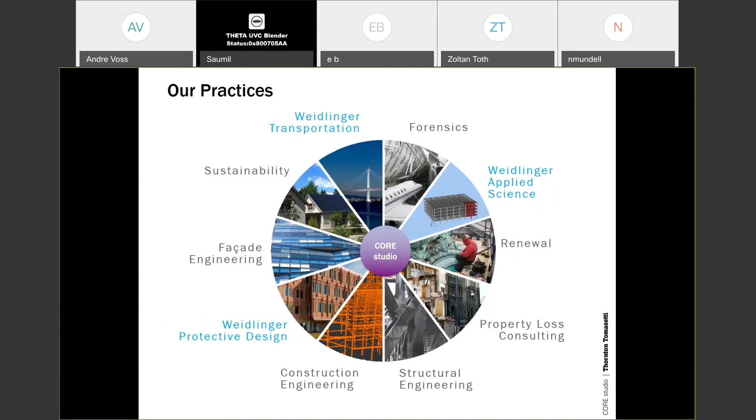Like I said, we're a big company, lots of offices and lots of places. New York City is the home office. And we actually are going to be merging with our downtown office next year into a brand new site on Wall Street, which is quite nice.

So who are we? Like I said, we're a group inside of a larger structural engineering company. Our mandate is to be a firm-wide incubator of ideas. So we essentially try to increase the value we bring to clients through innovation. Our goal is to take ideas from the firm as a whole and kind of shepherd them through the process to an actual tool that can be developed and deployed firm-wide.

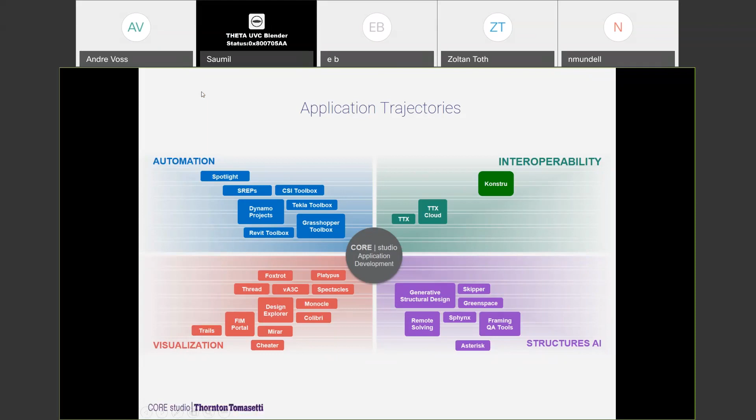Konstru is an application that allows translating a model between multiple platforms. It can be structural, architectural, and any other one.

The first step to upload the model to Konstru is to upload it to the online cloud, which has clients on multiple platforms. The upload process is really easy, it only takes a couple clicks, but it uploads all your geometry with all the attributes. So from Revit, for example, you can bring all the families and categories. And this web viewer allows you to visualize your model by different types of elements.

You can also see all the changes that you made in the model. So as your project progresses and you upload multiple versions of the same file, you can see what changed, like which elements changed or were created or deleted in the model, which is very useful because sometimes it's really hard to track all the changes, especially when you have a big team and multiple offices across multiple cities.

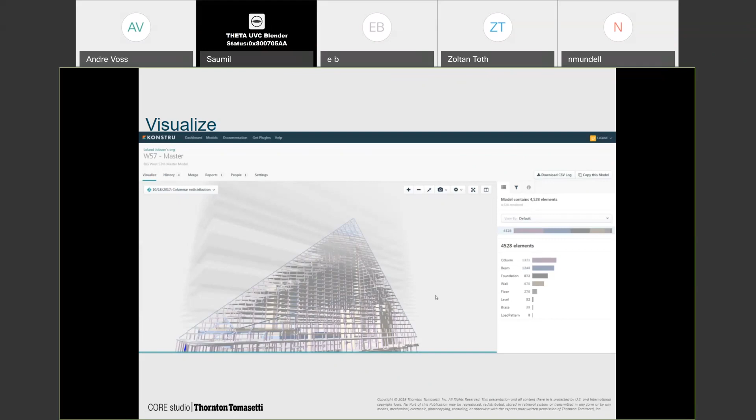Here is an example of collaboration using Konstru. A model is created in Rhino and Grasshopper, then easily exported and translated to multiple platforms with all the attributes attached. So it's not just pure geometry, it's all the information that is so important and necessary for collaboration.

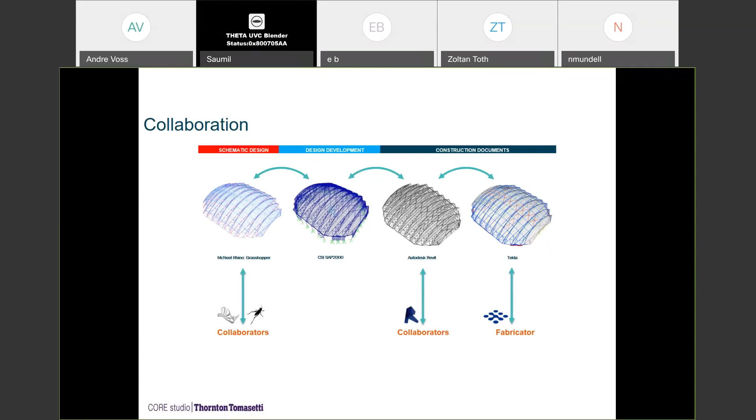The second application is Mirar, a web viewer. This is an example of a model, a Revit model, that's been brought into Mirar.

Mirar is a sharing and viewing platform. It also brings all the attributes of the original model. For example, here we have different families and object types, and you can easily color this model by attributes in the web viewer. It's really easy to see all the elements and share this with collaborators or your client. Mirar models are really easy to upload on the web and access from any mobile device, even your phone.

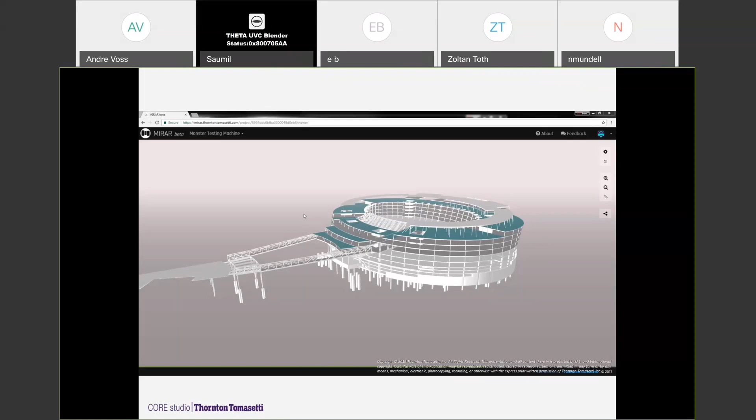Thread is another visualization application which takes a CSV file as input and allows you to create a dashboard to represent your project. We have a lot of different widgets you can see here, different kinds of diagrams and images you can place on your dashboard to create a report about your project.

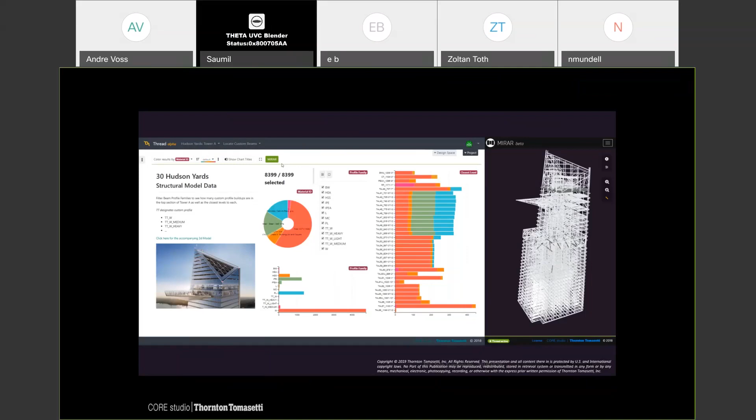These two apps, Thread and Mirar, can talk to each other and the models can be linked. So if you filter some elements in Thread by a certain aspect, those changes in visualization can be viewed in 3D in real time in the Mirar viewer.

This is another example. This was a Revit model brought into Thread, and on the left you can see two widgets that represent the types of geometry that exist in the file. On the right is the Mirar viewer, a 3D model that can be rotated, explored, zoomed in or out, and cropped in any way.

When you filter, you can select one of these objects, and it will filter and color the elements in your 3D model by the attribute you select. This can really help you visualize your model, since it's often hard to see some elements of the model, and this allows you to visualize them really well.

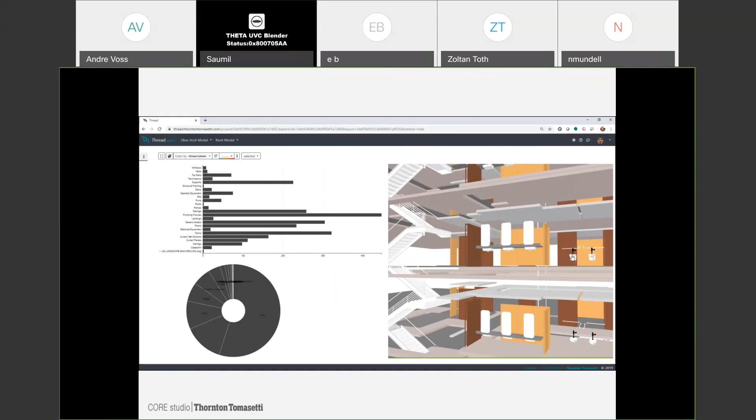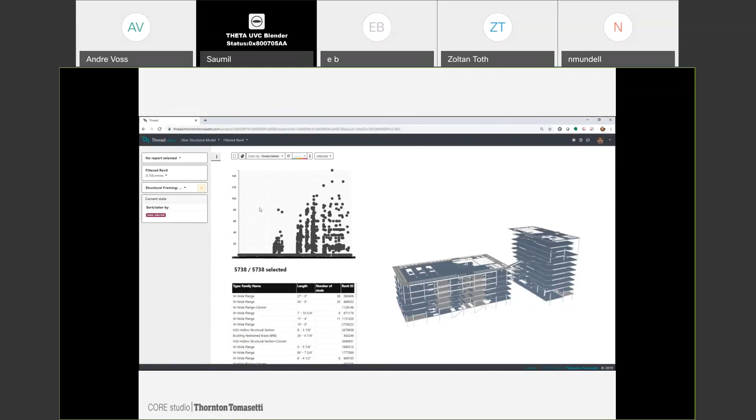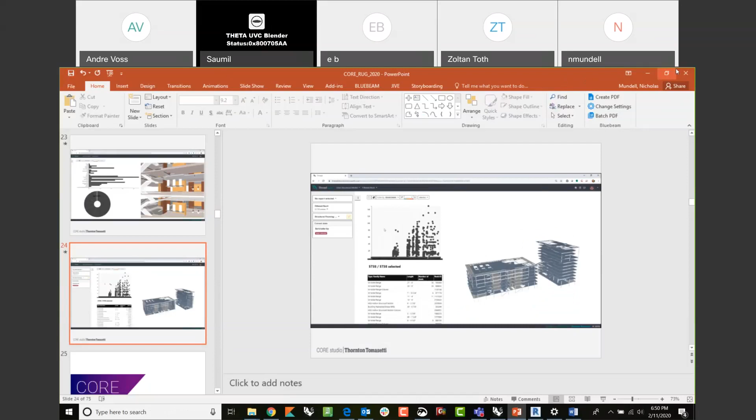Try and save a couple of these videos. I know it will work. PowerPoint can be quite painful. Put a lot of work into making a live demo for a video, and the video doesn't play. A restart should do it.

Yeah, so the first app that Sasha mentioned there, yeah, but this is a Microsoft product. Microsoft product. Yeah, okay, will this play? Yeah, all right, so we'll just do it at this scale.

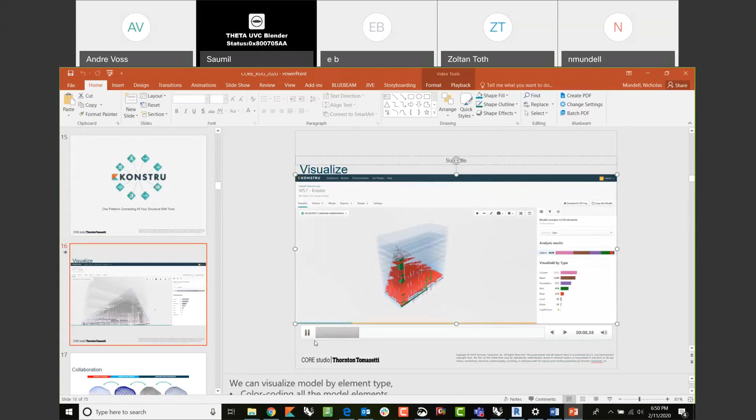So this is a Revit model we uploaded to Konstru. We're going to visualize first by type of object, so you can color by type: show me all the floors, all the walls, all the beams.

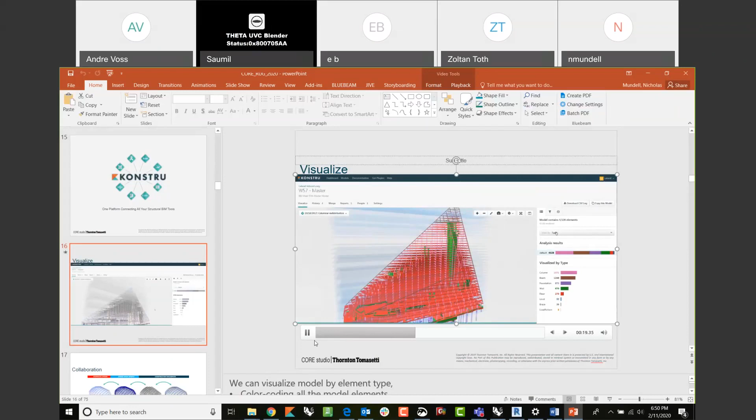In addition to color by type, because this is a database, and every time you upload to the database you're creating a new version of the file, we can actually visualize by change. In this case, we're looking at the model and seeing that since the last update, 328 objects were updated. We can zoom in and see it was actually the properties for the facade columns. Click on a facade column and it'll tell us what the size was before and what data changed after.

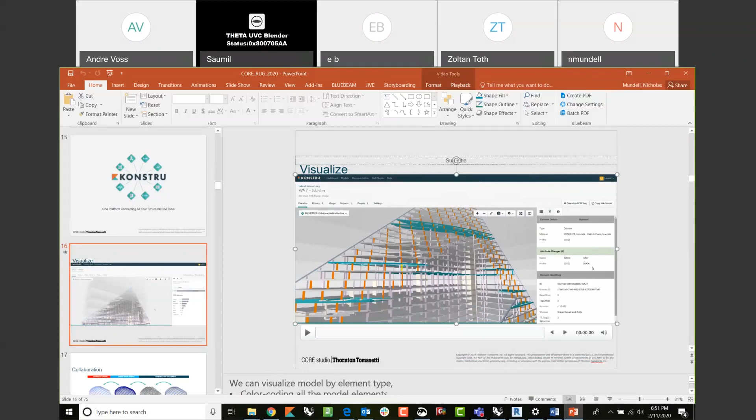We have a fix for the videos, but I'll just keep moving it a little bit. Sorry, Sasha, to jump in.

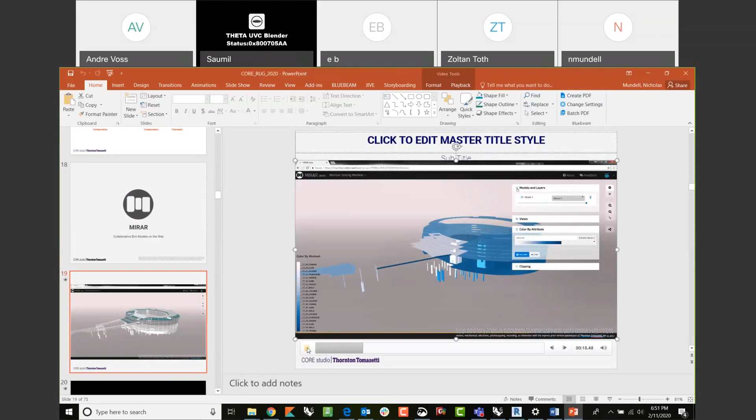All right, Mirar. This is a button we have inside our Revit platform. You click upload and it takes a Revit model, uploads it to a website. This isn't quite as detailed as Konstru, but you get all of the Revit properties attached to it, enabling you to make visualizations by, let's say, color by work set—show me all the objects on every single work set and give me a visualization of those colors in the 3D view.

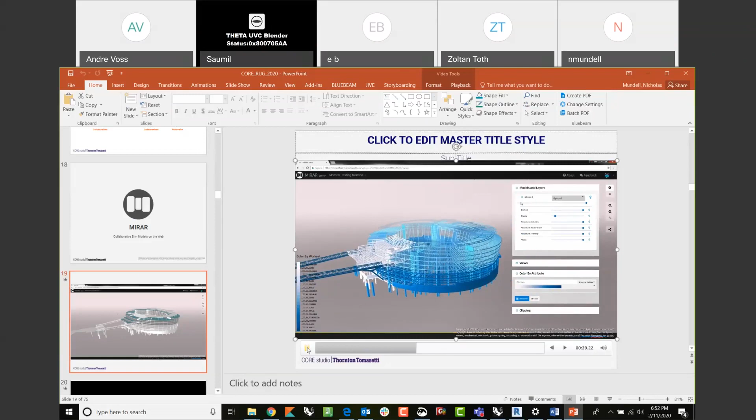Any Revit parameter or data attached can be filtered in the Mirar view. We've also got controls over extents, clip planes, transparency—most of the things you want in a 3D visualization. All the data is still attached, so you click on an object and get the attributes and properties on the left. Clipping regions and all that make large 3D models much easier to handle, since most of the time we're only really investigating one floor plate at a time.

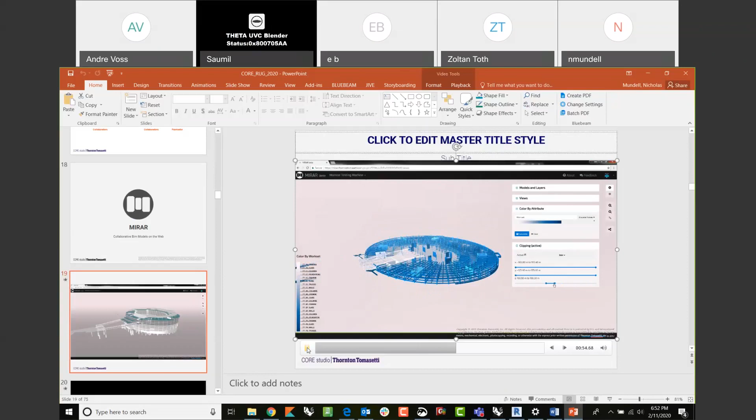So these are apps we've developed for TT to increase our collaboration and efficiency. If TT people want to share a Revit model with someone who doesn't have Revit, they upload to Mirar, and they've got pretty much a licenseless 3D model.

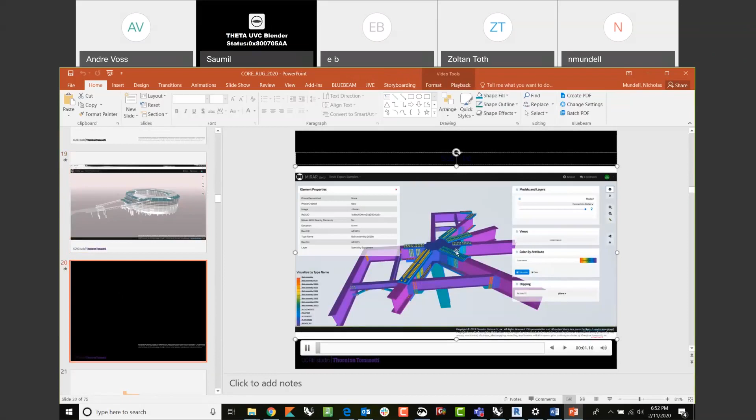Next little demo video is some more Mirar. We don't use it for just BIM models, we do a lot of steel detailing, so this is a Tekla model. We do our structural analysis, taking our analysis models and extracting relevant data, making visualizations our engineers would otherwise be unable to create in their native platforms. It's really just data visualization, taking objects with information and giving users a different way to show it on a screen.

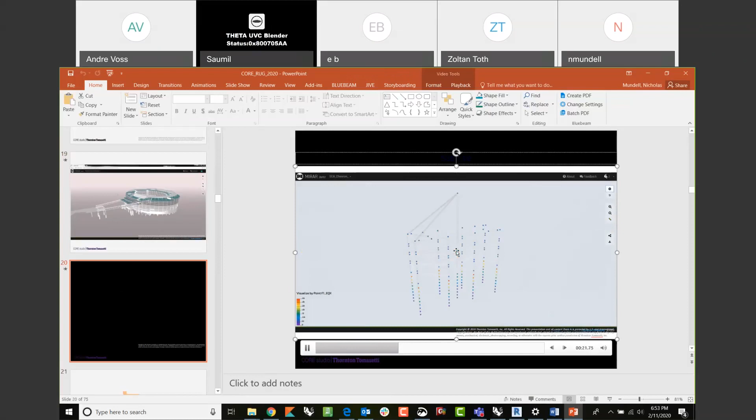This is a really nice video. Mirar was our first step, making just 3D visualizations. Then Tableau became a really big deal, and we decided we had to get into dashboards. So this is taking a Mirar model and tying the visualization to attributes that can be filtered through widgets in a dashboard. Show me all the beams of a certain category in the model, show me all the objects over a certain force level in the model.

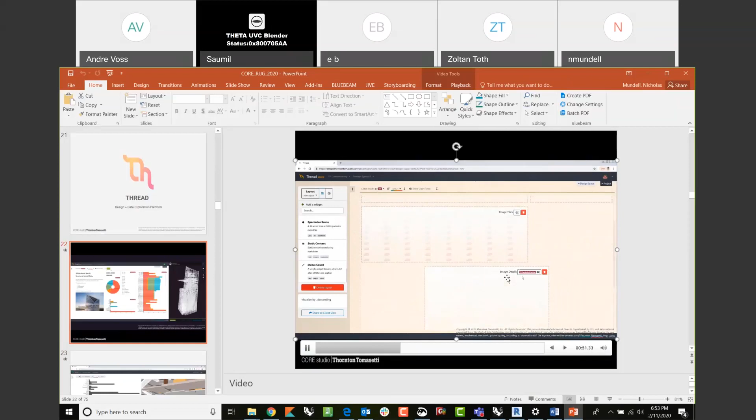I'll leave this one quite long, but we're uploading images, we're uploading data sets. Here's our dashboard. Lay out the widgets you want, choose the graph types that make sense for the visualization you're trying to make. Lay it all out, and then start filtering through your data.

Did anyone here have experience with Design Explorer in the past? Design Explorer was a parallel coordinates chart, pretty much similar to what you see on screen here, developed by Mostapha from Honeybee way back in the day when he was an employee of Core Studio. So we're taking that to the next level with Thread, having the ability to add many different widgets, not just parallel coordinates. You can even do search bars.

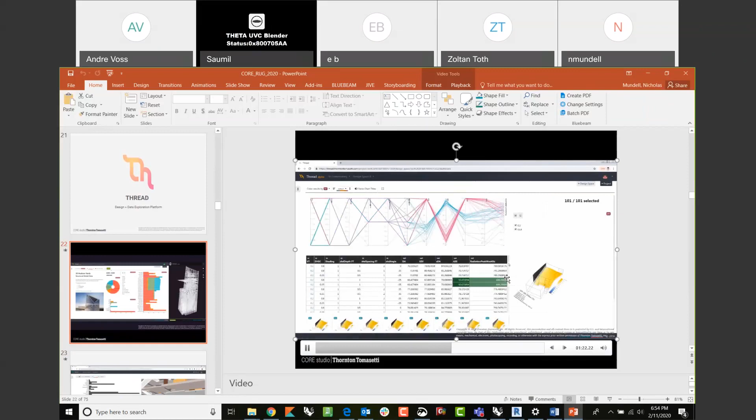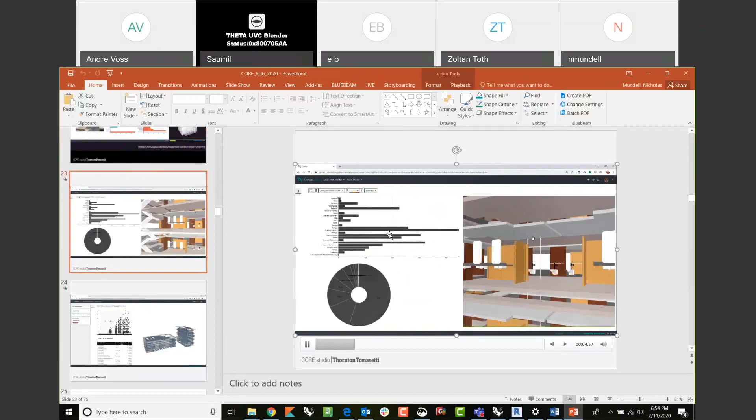So Revit model search is a possibility with Thread and Mirar. The last video we have here shows a model uploaded from Revit, and then using the widgets on the left, all the properties are there, just like you would see in Mirar. We can start to color by or select specific objects from the model and then apply the graphics on the left to the model on the right.

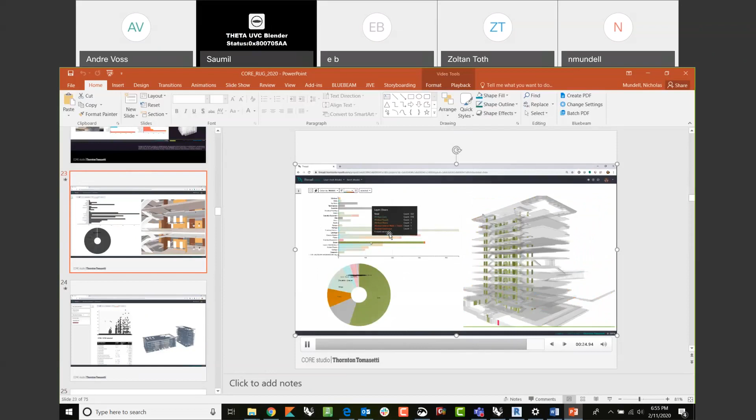So it's much of the stuff you can do natively in Revit if you're pretty savvy with filters and all that carry on. Our goal is to build stuff that even the most basic Revit user has to click one button and go to a website, and these are all prepackaged for them, so there's very little effort on their part to put it together.

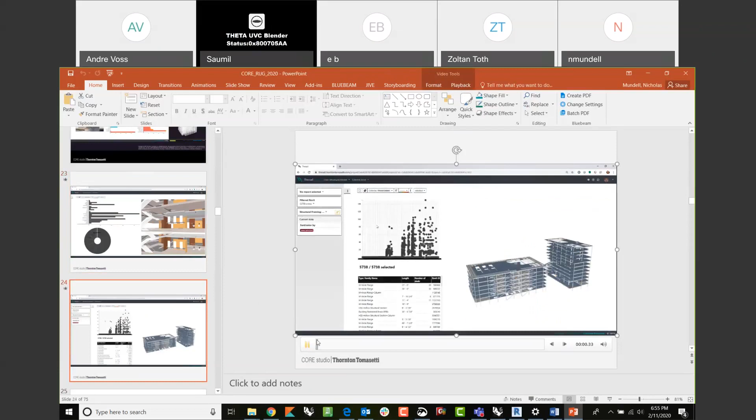The last video here is specific to structural models. This is where we're visualizing the number of studs as a property on the objects in the steel framing. So that graph on the top is showing you the length of the object versus the number of studs applied—that's the ratio we're looking for here. Again, as you filter through the graph, the model visualization updates based on choices made from the widgets on the left. It does depend on models being data rich to make use of this information, but we assume that with BIM models, we're making more and more data rich models as we go.

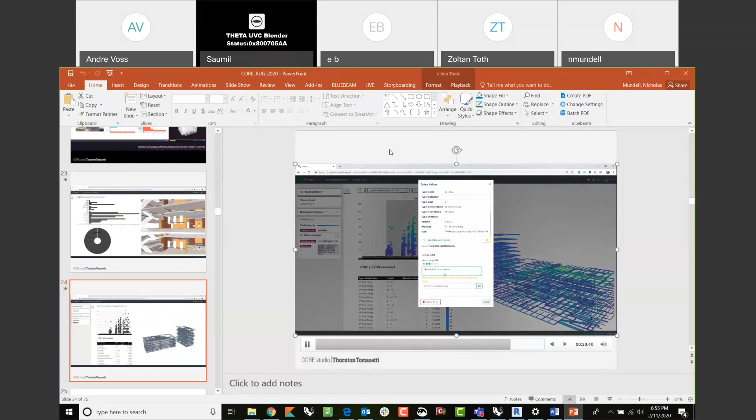Okay, so that's the end of that section. Jonathan's going to jump in now and tell you a little bit about core modeling. I think we have some videos in here too, so you might want to—I can't remember, is it a GIF? Want to go full screen? Try full screen. I think you guys might fail.

Okay, hi everyone, my name is Jonathan. I'm with Core Studio, more specifically Core Modeling. I'm one of the computational designers there, and I'm going to tell you about a couple projects we've been working on or have worked on that reflect the stuff Core Modeling does. To start, we're going to talk about Pittsburgh Airport, more specifically its roof, which is what Core Modeling got tasked with.

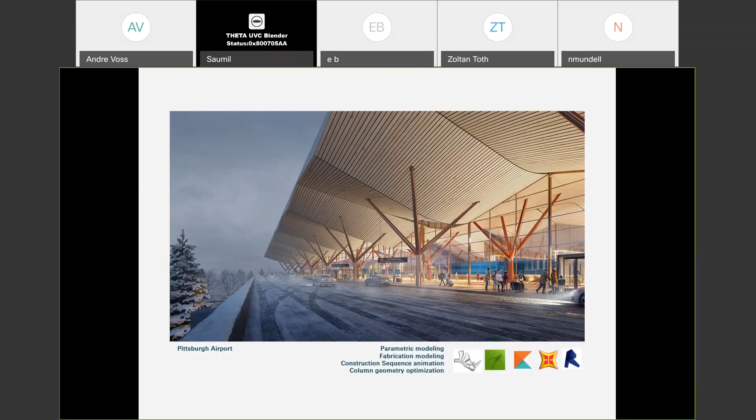It has to deal with a series of many conditions, and we went through all sorts of different software, including Grasshopper, Rhino, Konstru, Revit primarily, and SAP, among others.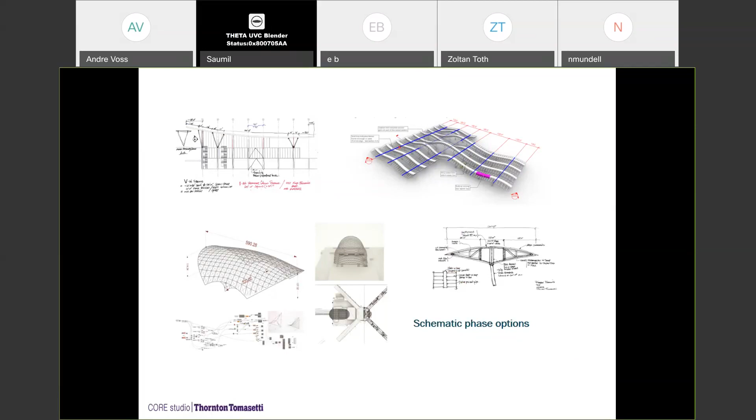The Pittsburgh Airport, one of the biggest challenges was solving its roof. You saw the architects' undulating roof systems. They tasked Core to figure out different ways we could, in collaboration with engineers, create structures for the roof, along with spines and all sorts of different design iterations. Ultimately, we ended up on a simpler design that consisted of a series of bays that would run along each individual ribbon. This is the one you see on the screen here.

To get to this point, Core Modeling had to go through a lot of different parametric solutions, ultimately building a script that let us generate a series of framing that we could import into Revit and create drawings from it, which from the engineer's point of view is amazing because it saves time. But from the architect's point of view it's also great to be able to make changes to the roof, generate framing, pass it back, in a continuous feedback loop.

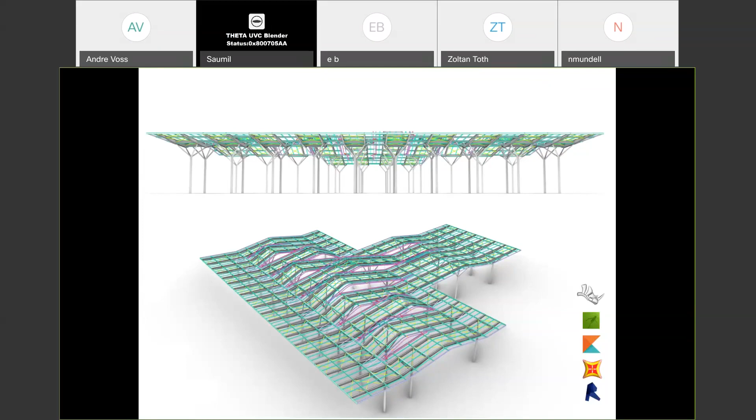It was also great using the software we have in hand, like Grasshopper and Konstru, which let us easily go between different analysis platforms, or Revit, which is more like a BIM and drawing platform, and so forth. Any changes that came our way, we would go in and try to create the script that could accommodate for such changes.

One of the things about Pittsburgh that stood out the most was that it was so detail heavy. As you notice, there are these sort of columns that stand under it, like tree columns, as you see in the bottom right. What was interesting is that at first they were all very unique. You have this undulating roof structure, so how do you solve for something that's unique and make it a little more standard?

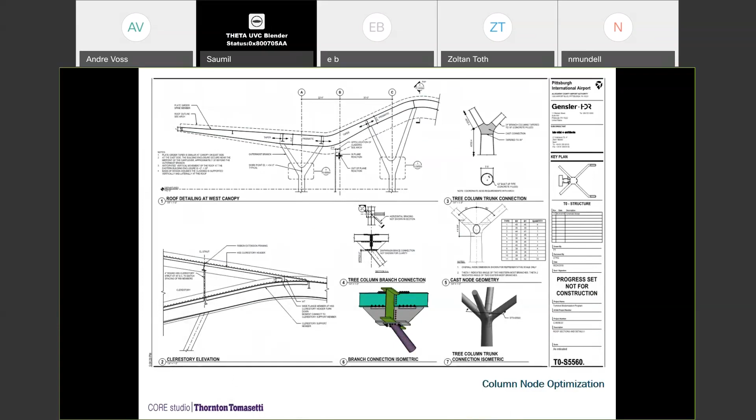In other words, don't blow up the budget. So we started looking into other ways of optimizing. We took the roof and started having it talk back to the columns, and maybe optimize the angles between them, which is what this little animation is showing. It's an optimization, trying to figure out how we could take all those nodes representing the columns and minimize them to a series of types. Instead of having like 20 different column types, we have maybe 10 or 8 or 7 that we can just cast repeatedly. This saves budget, helps the architect keep designing while maintaining its aesthetic, and helps the engineer keep its sanity, since we're not having to size all these different unique members.

One thing I also wanted to note about Pittsburgh Airport is that it was one of the projects that really emphasized communication between design, with the architects using a lot of Rhino and Grasshopper, and then Revit, the BIM platform that lets you do everything we all know how to do now. Thanks to the tools we developed in Core Studio, primarily Konstru, we were able to seamlessly go back and forth, creating models that we could update in Revit without having to regenerate an entire new set of frames within Revit.

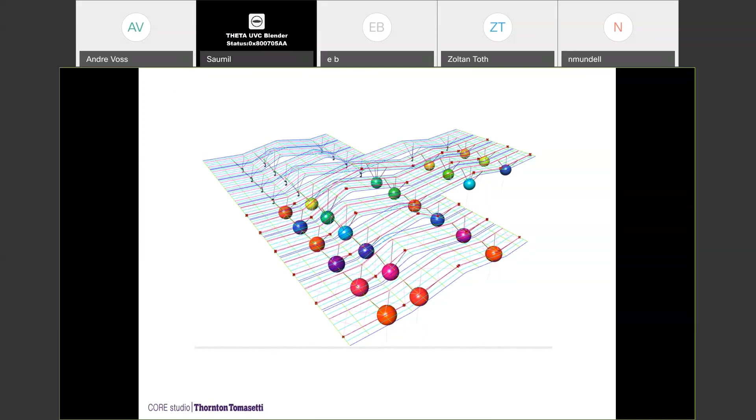Here's another project I'll quickly touch on, more on the design-heavy side, where Core Modeling was tasked with helping fabricate the facade. This is the Lucas Museum of Narrative Art, and Core Modeling of New York City, along with the LA structure team of Thornton Tomasetti, was tasked with rationalizing what you see on the exterior, this crazy looking facade.

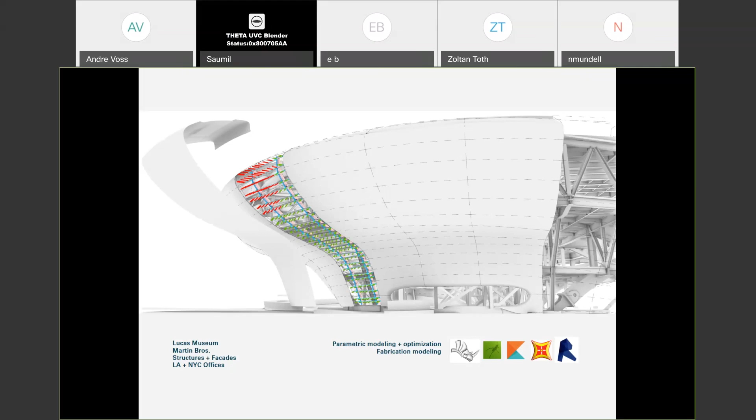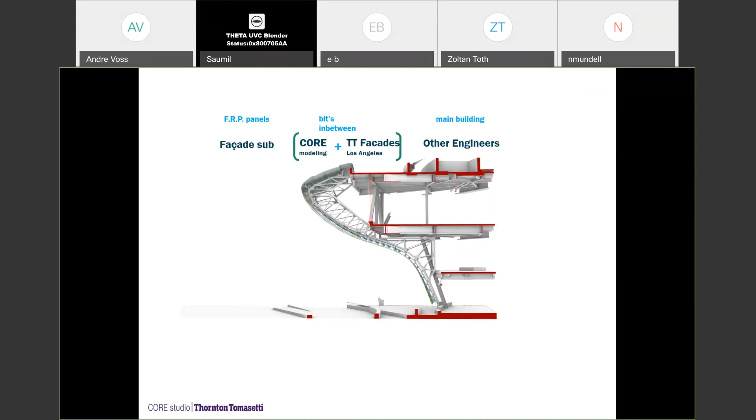That's kind of what I'm trying to explain. You have Core Modeling and TT facades trying to figure out the bits in between, other engineers working on the interior structure, and a facade subcontractor working on fabricating the facade.

What was particularly different about this project compared to others is that it was essentially one giant Maya mesh. I don't know if you're familiar with Maya, the modeling platform, but think of it as just a crazy mesh in space with absolutely no dimension, no measurements, no sensibility for fabrication. Once we got the model, we had to talk with TT Facades and try to rationalize a way we could break this into pieces.

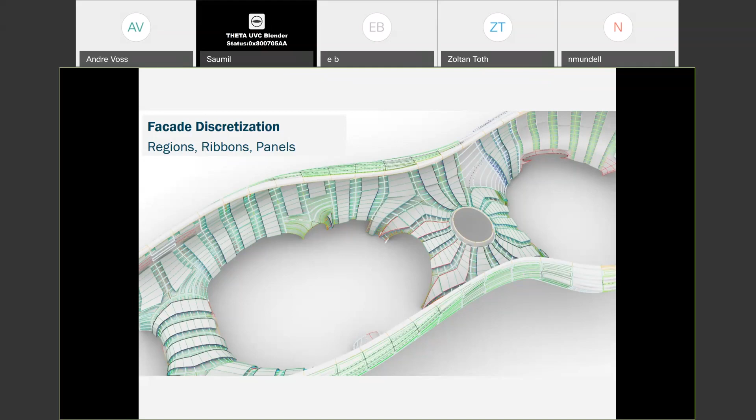In other words, discretize it into regions, ribbons, and panels. We looked at the topology of the thing and started figuring out how we could create ribbons. Each ribbon is then composed of a series of panels that we could then think about structuring back and forth, ultimately taking something that looks almost alien, like a spaceship, and bringing it down to reality—something we can actually build.

Along the way, we worked with the engineers and fabricators trying to figure out different structural assembly concepts, how we could begin to look at primary, tertiary structure, and then connecting back into the main structure, while still maintaining an overall aesthetic of the piece and not creating an overly complex design.

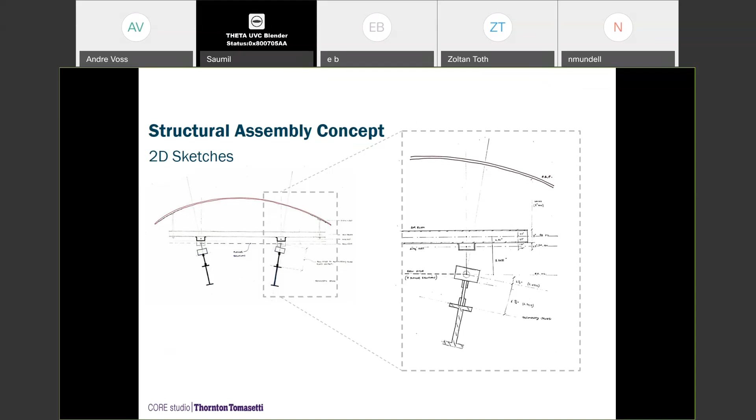What you see here is a series of beams attached to a series of ball hitches, but they're attached to trusses, which then connect back to the major structure. The arc represents one of the panels, because as we saw in the previous images, none of these panels are remotely straight in any way, shape, or form.

One of the things we do have to look at is planarization, which using Grasshopper and Rhino, we were able to quickly generate all these different conditions and look at planarization, and different ways we could create panels that could then inform placement of elements, members, and frames.

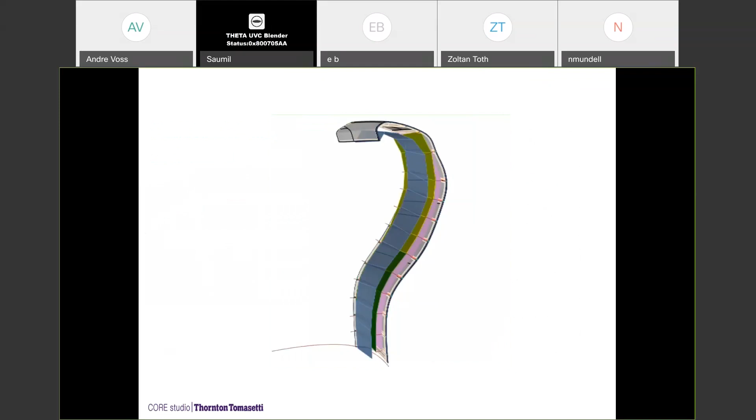Once we got a workflow in mind and established, we were able to quickly start developing and testing the overall facade, and then creating a series of center lines. The benefit of that is that once we create a series of center lines, we can then translate these pieces of information into any other software.

It can be for analysis, or it can go straight into Revit, which ultimately this thing had to go into Revit, which was the workflow.

No, it's fine, it's fine.

Anyway, one other thing I want to say is we were talking about the workflow of the Libeskind project, where it started out pretty heavy on Rhino and Grasshopper, and pretty much going straight into Konstru, and then to SAP and other analysis platforms.

Ultimately, once we created all these centerline models, we could then have the center lines being formed properties and bring them into Revit. So then we could start using Revit to create all our drawing and documentation, eventually creating something that's kind of out of this world looking, but making it rational.

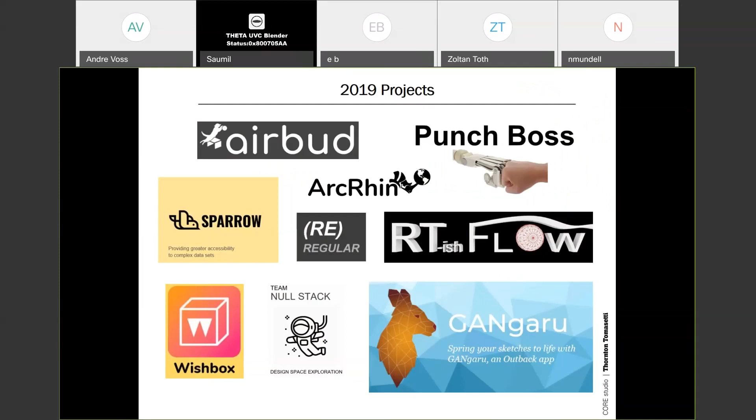All right, so the hackathon. This is a brief overview of some of the projects that you'll find on the GitHub repository. I'm not going to be speaking about all of these today, just a couple of them. All right, Airbud. Who's here heard of Airtable?

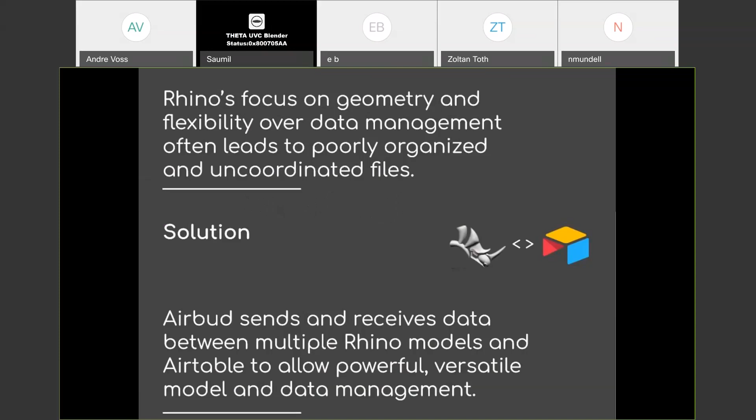Okay, so Airtable is a web-based database. It's kind of like Google Sheets, basically, just a little bit smarter. So we had a team here who looked at that really nice platform, looked at Rhino, and decided we could make Rhino a better BIM platform by tying it to a database. The goal here was to take a Rhino model and actually link it to the Airtable platform, so Rhino objects can feed and be read from Airtable, and Airtable data can be fed back to Rhino. So another mashup problem and another mashup solution. Again, the GitHub code base is available via that link.

Next hackathon project, ArcRhino. Anyone use ArcGIS in the room? Okay, so in this case, another mashup. They see benefit in using Rhino for AEC modeling, but they also have a lot of issues getting good GIS data into Rhino. There are some Grasshopper plugins that do this, but the goal with this project was to essentially take ArcGIS and the new Rhino Inside libraries Rhino have released to open up their code base and try to literally directly link ArcGIS to Rhino. So mapping environment, ArcGIS, choose an exchange format, convert and import, and then design. All they were trying to do is smooth out that process.

Most of the time people come to these events with problems that they have in everyday life, and this was one of them. The concept here was to just try and make a button that would solve 4 hours worth of work for them over the weekend. They did a pretty good job, I would say.

Punch Boss. This team showed up with a robot, which we always appreciate. They had a little, I'm not sure the name of it, basically a big old Roomba looking thing, circle on the ground there. Their goal was to automate essentially data capture from construction sites. So they had a little camera and a little sensor placed on this robot. I would say they were the most ambitious in their project, but probably they had the best demo. Let's put it this way, they had a robot that moved around.

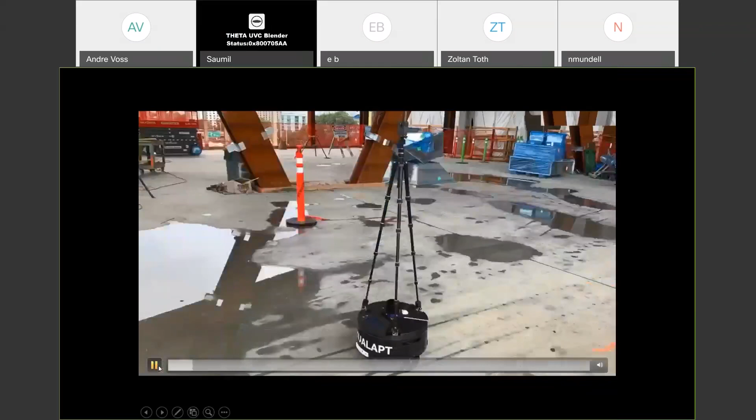At the end of the day, they were looking specifically to try and get digital mapping from the camera to align with a ground plane. That was the real technical issue they were trying to solve. This, by the way, is just an image of the robot in use, not from the hackathon specifically. The goal was to do sort of an augmented reality approach, tie the ground plane to the camera inside the robot.

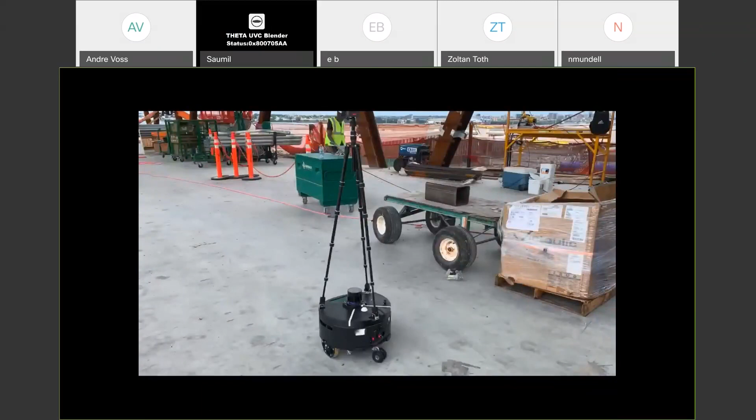Regular expressions. Anyone use regular expressions? Okay, so these are basically a set of syntax for code, and they're very useful for automating checking of data. You can very quickly write a couple of lines that will do a lot of work in terms of looking at text, changing text, altering text, which can obviously be very difficult to do inside of a Revit model.

I'm sure everyone's familiar with Dynamo and the ability to make wholesale changes across a whole bunch of Revit objects with Dynamo. The goal with regular expressions was to give that same functionality to a Revit file. So build a little WPF form in Revit where you can launch a regular expression interface, write regular expressions, and have it feed into your Revit model and select objects from your Revit model. This was something that the guy who developed this actually worked on his own. We don't really like one-person teams, but he was really into the idea and really wanted to get it out for the hackathon. I think he got about halfway there. He would have done better with a team, but that's his choice.

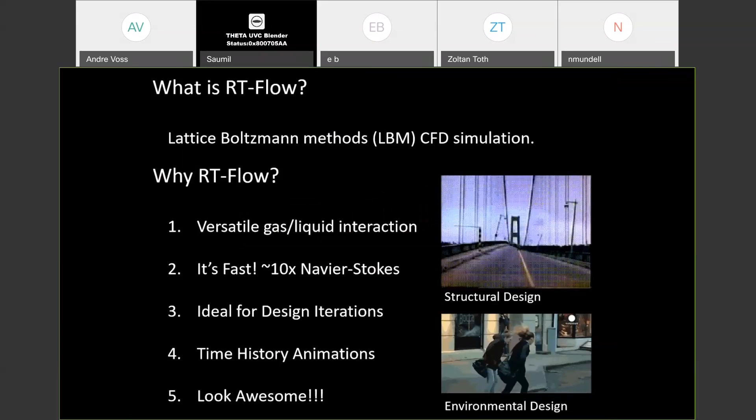Best open source was RT-Flow. It's essentially trying to link fluid dynamics and Grasshopper with Revit files. This is essentially taking existing libraries inside of a Grasshopper model for CFD analysis and then trying to integrate that into their Revit file. Again, another mashup between two software.

All right, the best overall hack this year went to a team called GANgaru. This is a very impressive project. I have to say, I'm pretty sure they came with some libraries in their back pocket because they did such a good job, and I'm sure you'll all be very impressed.

It does leverage a tool released a couple of years back called Pix2Pix. Anyone heard of Pix2Pix? Okay, so if you've heard of Pix2Pix, you'll probably get what these guys were trying to do. As architects, we do a lot of sketching in our lives. If you're fancy, you can do 3D sketching. But there's obviously a big gap between a two-dimensional sketch and the rich 3D models that we're all used to building at the end of the day. So these guys, the pitch was, what if there was a way for you to sketch in 2D and then directly translate that into a 3D model?

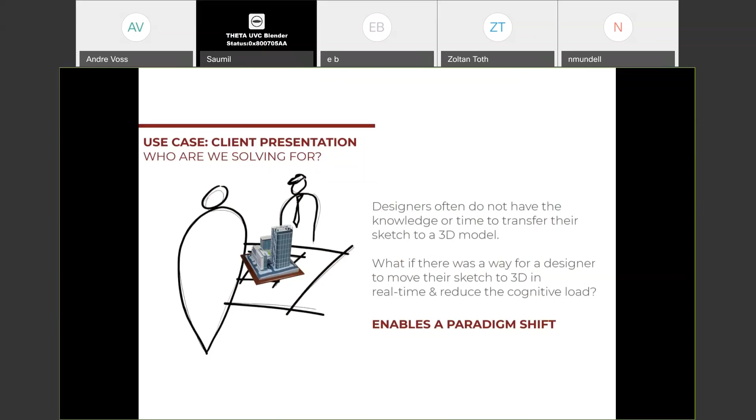Sounds crazy, right? But this Pix2Pix platform is very useful. So what they're doing is they're taking an image, RGB values, and breaking it down to try and get a depth map out, as well as an edge map and a contour. So taking an image, breaking it down to a series of layers that they can abstract from to try and generate 3D objects. So imagine I did a sketch of that little box on the left. I would input it to this platform. I would get a 3D box on the output. That's the goal of the tool.

I think they did a really good job in presenting. Like I said, I'm not sure how much was actually done in the hackathon, but they did end up winning.

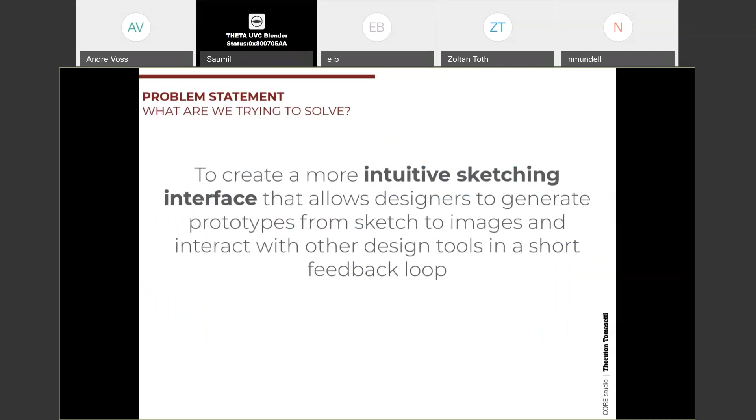I do have, we've got a video here. Well, this describes what Pix2Pix is doing. So create a sketch, and through GAN networks, generative adversarial machine learning networks, you can essentially apply some photo properties to your sketch based on a series of edges and infill. So sketch a bad cat, get a really ugly looking cat, but it looks like a photograph. That's the software that they're leveraging to create their app. And I have actually put a link here to a video that describes the paper that they're using to generate their app, which is really fun to see.

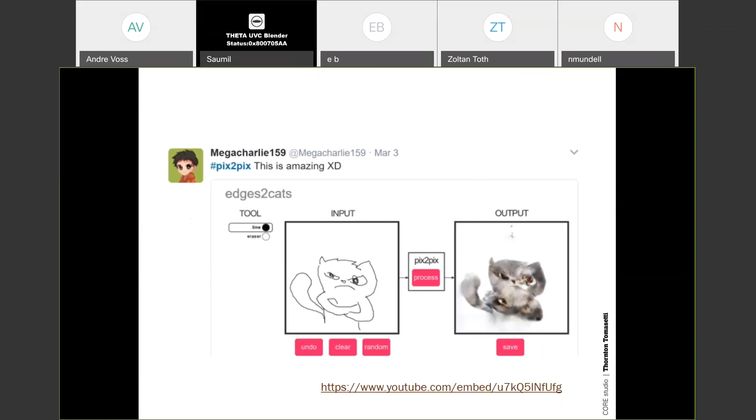I highly encourage you to look at that, and there's a video of their app on the GitHub site as well. I don't have one here, but the goal is machine learning training - can you feed in photographs of buildings, and can those be leveraged in any future 3D sketch to choose an appropriate form in the platform?

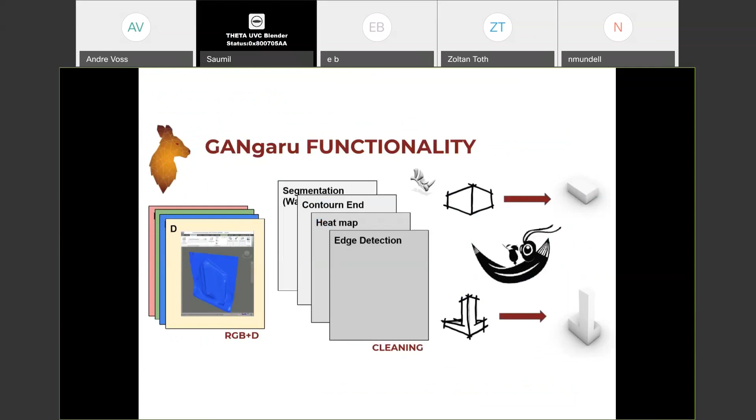That's the goal. Sounds crazy, but they actually managed to demo a version that showed the box-to-box solution - that video is available online. I have a couple of stills, this is their tool plan. Obviously getting from that terrible sketch to that beautiful model is too much to ask, but there's a bunch of smoke and mirrors in these hackathons. Good ideas don't always have to have solutions in the background.

Okay, to finish with today, I'm going to talk about Swarm for Revit. So I've mentioned Rhino Compute a couple of times - who's heard of Rhino Compute before here? Who's heard of Rhino, the software?

Rhino recently opened up their library of geometry functions - it's called Rhino Compute. You can set up a web server where you can call Rhino functions and retrieve results. So let's say I take a curve, call Rhino, split curve, I get a split curve back. That's kind of the goal here.

Some of the videos you've seen online may be stuff like Rhino inside of Revit, which takes some of the geometry functions that Rhino has and ports them literally inside of the Revit platform. Swarm is our attempt to take that base technology and apply it to the AEC industry - you don't have to be an expert or a pro, but you can do things in Revit that you couldn't do previously based on Rhino functionality.

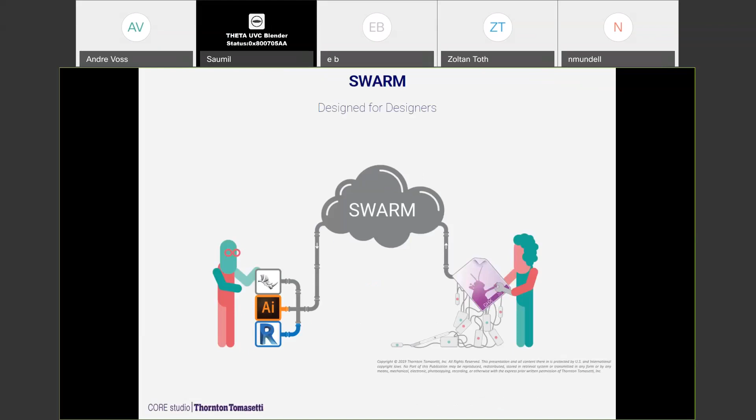So with Swarm, it's kind of 4 different things. There's a design app marketplace - anyone can create an app, usually coded in Grasshopper, and upload that app to a marketplace. These apps can be free, they can be paid for, they can be sorted by domain. Anyone that works at TT has a set of apps, for example. Anyone can be an author, anyone can be a consumer of apps.

There's also a developer environment that enables you to make robust apps - again leveraging Grasshopper primarily. So if you know Grasshopper, you can build Swarm apps. And there's also a web interface. This tool is combining together all of the things you've seen so far: Mirar for web visualization, Thread for data and web visualization. We've tied all these together with Swarm and Grasshopper backend to develop a really nice tool.

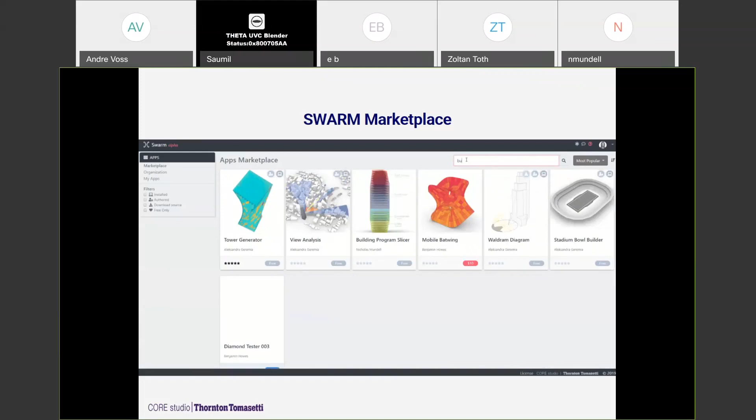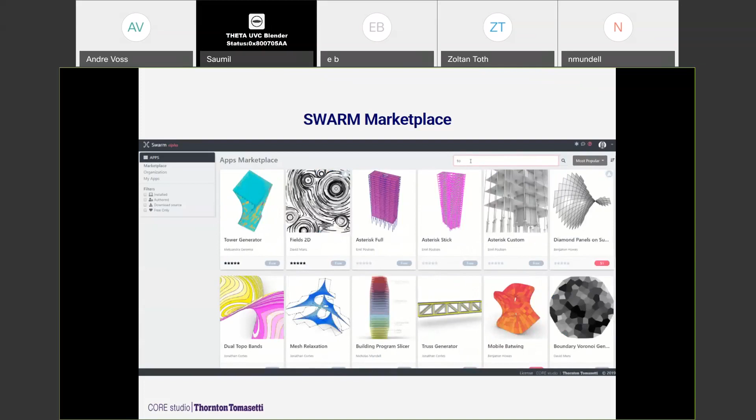So we have a marketplace - you can go online to swarm.thorntontomasetti.com, search for available apps. You have things like tessellation, you might have meshing - these are all up there currently. A tower generator that Sasha here built. You can get the app, install the app. Once you've installed it and you go to your platform like Revit, you're able to run the app from that platform.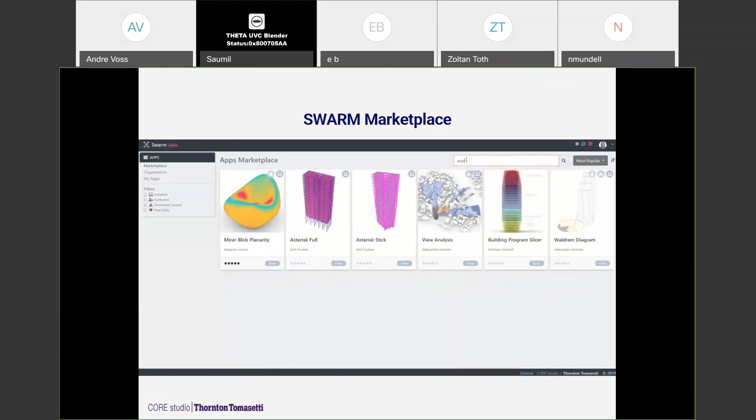There's a web player, so any app you create can be run in a website - don't necessarily have to be in the client platform. Let's say I make an app that creates a crazy roof geometry and the client wants to see it, but they haven't got Rhino or Revit. I can share the Swarm app with them - they can actually get control over any of the parameters, change the density, change the height if they so choose. Whenever you change the sliders on the left, the Swarm app is calling the definition in the background, resolving it, and pulling down new results. That's the kind of tech in the background.

Here's an example of Swarm running inside of Revit. Essentially what we're doing here is referencing some columns from a Revit model. Now, TT CORE studio has built an app that measures trib areas for us.

So we have a Grasshopper definition that does some Voronoi work to measure trib areas for columns. We built an app in Swarm, uploaded it to the website, and added it to our Revit library.

To find out trib areas, you need a floor plate and a series of columns, which we're selecting here, the columns first. We reference them into the app on the left, and then you're going to see the app solve and get a little preview. Nothing's actually happened to the Revit model here; all we're doing is extracting information and creating a nice visualization of trib areas for our engineers.

Fun fact, a lot of engineers do this by hand in a plan view, figuring out trib areas. So our goal here is to automate this process. We have a Grasshopper app in the background which we can tweak and adjust to the specific user's requests, and we've built an interface so they can use it in the platform they actually work in, which is Revit in this case.

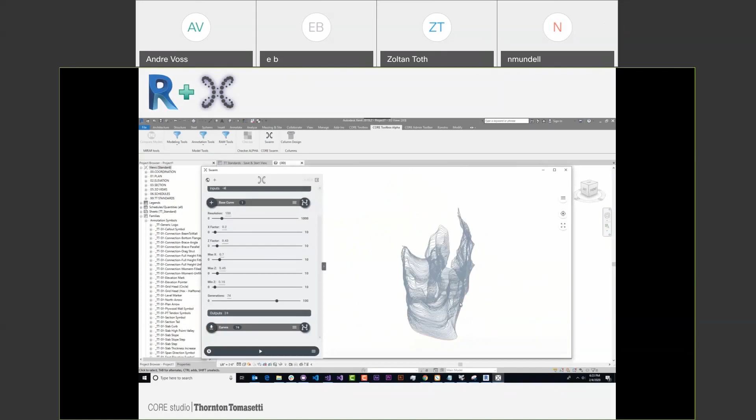This is mostly visualization, no information really hitting back to Revit in this case, but the possibilities are endless. This is an app that takes a series of crazy curves we generated inside a Grasshopper definition, and we're now running it in Revit and baking detail lines down to the Revit platform. We have about 5 or 6 object types we currently support in Revit, detail lines being one of them, and we're expanding that list as we go.

We're essentially trying to take Rhino and Grasshopper and tie them really, really closely together with Revit. You shouldn't feel like Revit is slowing you down in terms of design iteration, hopefully with these types of apps.

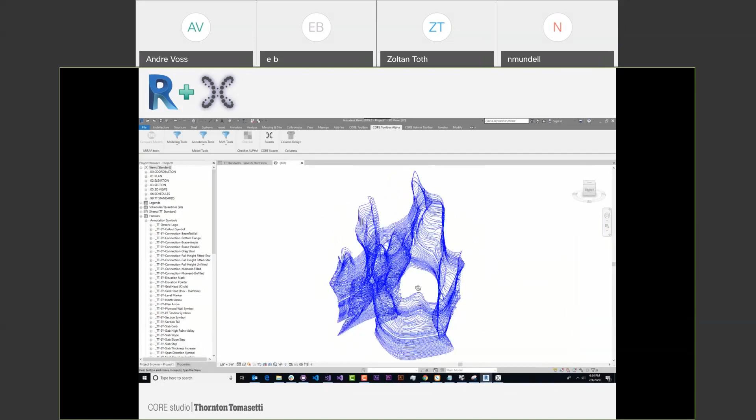Last one here, this is a floor framing tool. This is actually going to demonstrate how we send information back into Revit. Oh, it's going to play, look at that. So Revit's open on the right, and there's a series of grids in the model.

Swarm is open on the left. What you're going to see is Sasha referencing in grids and the floor plate from the Revit model to the app, clicking run. Notice that that's just going to update the visualization. In this case, it's a little trickier because we're actually doing the sizing of the beam as well, so in the background in our Grasshopper app, we have some code that does beam sizing. If you change grid positions or change locations of the floor plate, the app reruns.

She's just iterating and the visualization is changing. Once we've found a position we like, we can download those objects as beams that are sized to the Revit file. So again, this is a Grasshopper definition we launch inside of Revit that can send information to the Revit model.

Last one, obviously Revit's got a pretty good truss builder, right? It works pretty well, but at TT we find a lot of times we need to build more custom trusses. So this is an app we built in Grasshopper.

We reference a beam from the Revit model, make some changes in the properties in Swarm, and then run the solution. Once we like the geometry we get, we can bake it, using a Grasshopper term, into the Revit file. So maybe make some changes to the truss depth, truss type, and once we like what we see in the preview, we'll make that download to the Revit model.

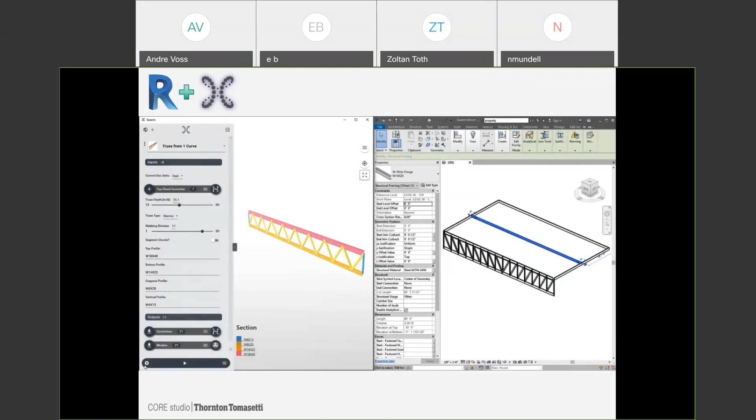All right, so Swarm is live currently right now. You can go to this website, swarm.thorntontomasetti.com. You can log in on the top right, and that'll basically give you access to our marketplace and allow you to download any of the free apps that are available. You can also be an author at this point and go to Grasshopper and create your own apps, which then can be used by other people inside of Revit, ETABS, and SAP currently. Oh, sorry, also Rhino. So any of these apps would also run in Rhino.

As well as the web. You have a web visualization you want to make. One note here, when you're signing up, we do prefer work email addresses. If you sign up with a Gmail, we think you're a little fishy, so just be aware of that. You want to give it a shot.

Okay, I got more than 20 minutes this time, Andre. Well, excellent. Yeah, thank you. You're welcome. Thanks, everybody.

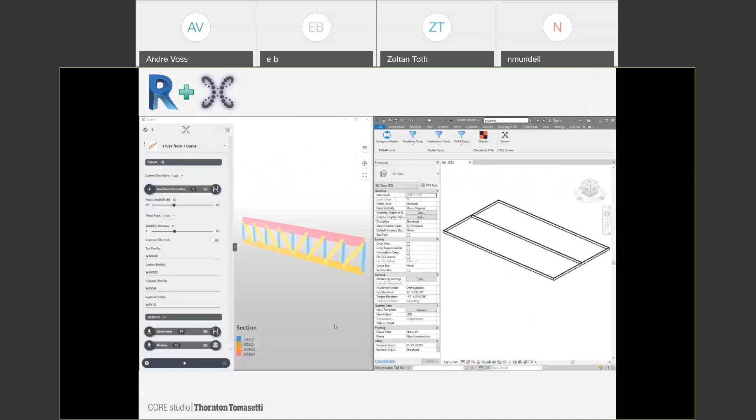What we do is we show them something like that trib tool. If you show an engineer who is literally doing that manually, and it might take them 3 hours, all you have to do is show them that video, and that's it. Walk away, and they will come find you and want to learn how to use the tool. Measuring trib by hand is so lame. And there are many things in architecture that are lame to do by hand. So we're just trying to make tools that take away those 20 clicks and turn them into 1 click.

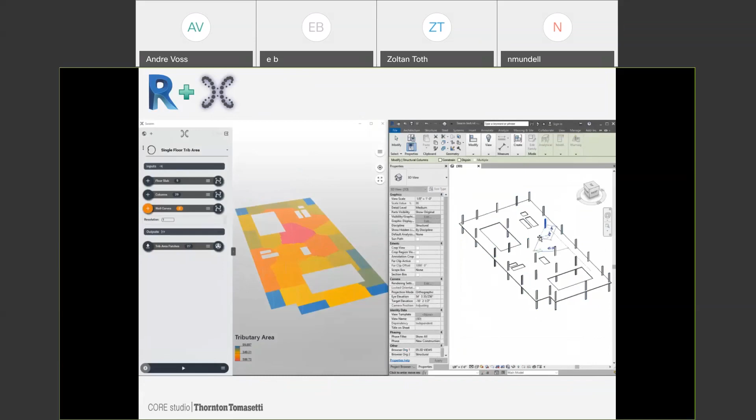So yeah, okay, this looks very similar to the beam system tool, I would say. Revit's really good at laying out framing for you. This does not use beam systems - it's just placing individual framing instances, full Revit beams. The object that you see there, the trick is that we're actually sizing it. So we are giving a structural solution to the beam based on its length. Reference objects in, move grid lines around - what you'll see here is the profiles output. So the W18 is actually what gets downloaded as a Revit beam. That's critical - we are always making native Revit objects.

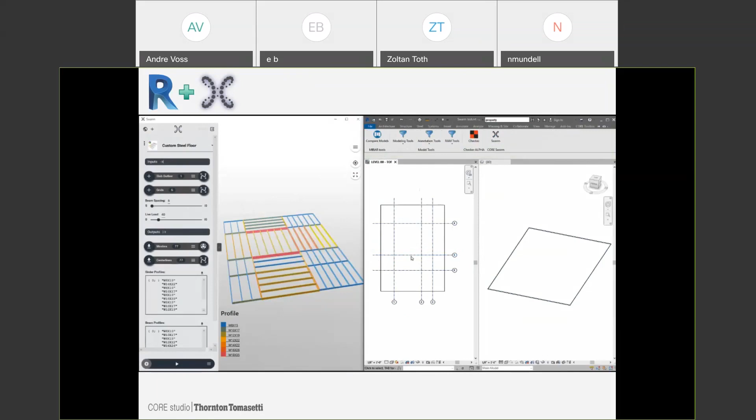We do actually also support adaptive components. Adaptive components are families in Revit that can pretty much be any geometry. We leverage those to build doubly curved meshes, for example, and bring them into Rhino or into Revit. Structural framing examples are more for the engineers. We do have an inflate mesh using Kangaroo 2 and then bring that into Revit as panels - that's one example video we have.

Swarm leverages all of the free plugins. So we have all the nice free stuff that Grasshopper has on our server. Paid-for apps are obviously a different category, but anything that's free in Grasshopper can be built using it.

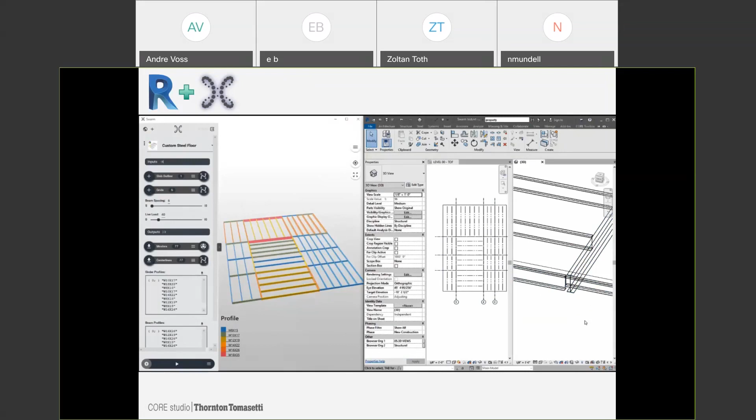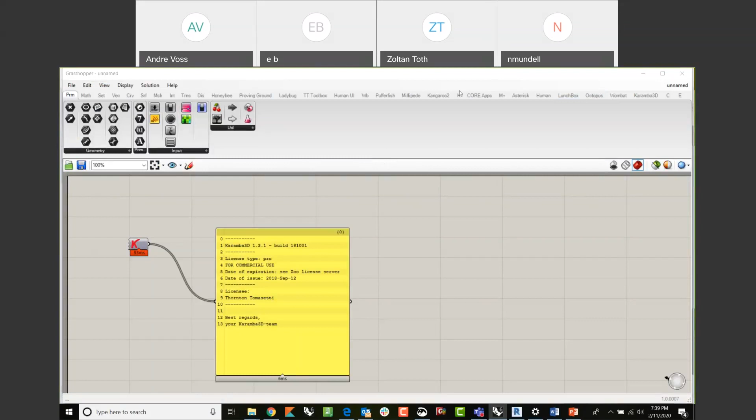Yeah, so I don't have the Grasshopper interface here actually, but I could probably just show you some of the components. We have inside of Grasshopper a whole series of authoring components. It's not so much create beam, it's more about create object with attributes, a swarm. So there's means of creating - anything you can geometrically build and then add attributes to it can be baked into Revit.

Cool, I think that's it. The rest is moving downstairs to the bar - we're up for an hour. I'm sorry, I love all the questions, don't get me wrong, but we need to be good guests to our host and not sit here until 9. That's what the pub is for.